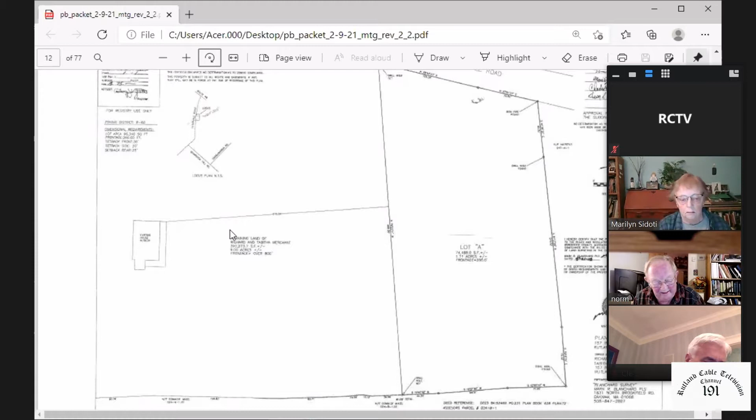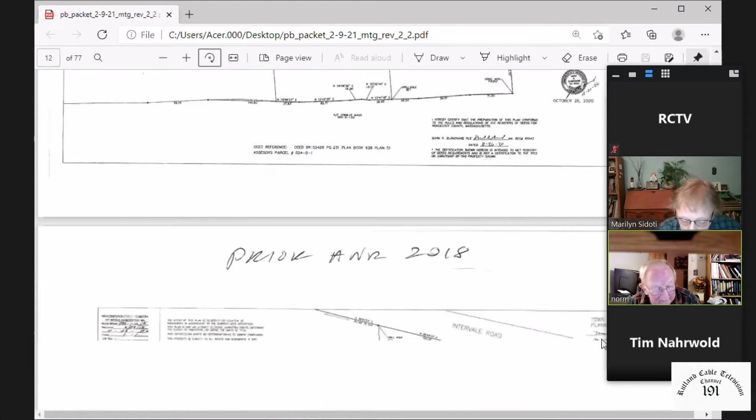Correct, Norm. This is Mark Elbag here on behalf of the applicant. It's creating a single lot. Is that lot A, is the land from lot A coming out of more than one other lot? No, it's just coming out of 157 Intervale Road, his house. It's actually lot B on this plan. Oh okay, I'm looking at it backwards. It's lot B that you're creating.

Okay, and with this ANR application, I'm sure you'll see at a future meeting an application for a common driveway special permit to serve these 3 lots, which is why the easements are delineated on this plan.

Let's see, I'm seeing with my less than perfect vision, 1.91 acres in lot B? Yes, correct. And right around 200 feet of frontage, a little bit more. Yeah, slightly more. I think the lines are 200 feet in width, so on that angle it's a bit more than 200.

Okay, any comments from the board? Yeah, I'm looking at this - Mark, isn't this in the R60 zone? Because Sassawana is the delineation between R40 and R60, isn't it? Yep, R60, acre and a half. 1.49 is not an acre and a half. No, that's 1.91. Oh, I'm sorry, I thought it said - I couldn't see, I've got the small version. Oh okay, I apologize, you're correct, you're right, thanks.

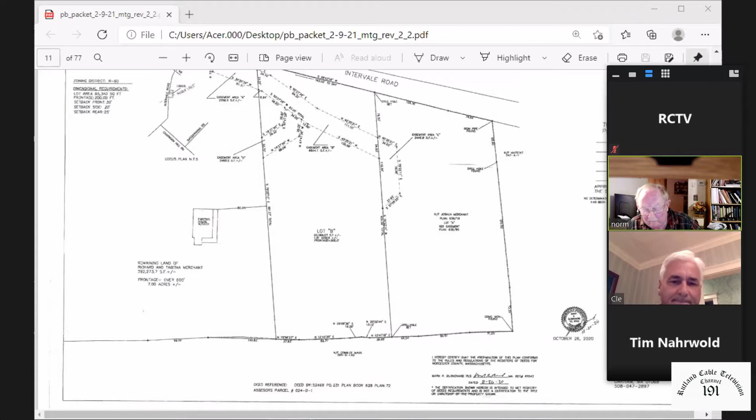So while the easement's not necessary to be shown on the ANR plan, I guess the question is whether this ANR plan is also going to be reused for the special permit common driveway plan. Yes, it is, and that's what's in the application package.

So if the board was to cross out easement on here or disregard it altogether, that would really carry no consequence. The fact that easements are shown on this plan does not provide any rights to use a drive to access more than one lot.

It's really just to keep all the titles clean and keep everything as neat and clean as possible at the registry. So all instruments will be created off of this one plan.

Just to finish the thought, Mark, so currently, as the board recalls, it was a site plan granted 2 years ago to allow for a 2-lot common driveway, which is what's currently in effect. So that is what's in effect now.

The other common driveway can't go into effect until a special permit is granted. Correct. All right, I'm fine. I just was trying to make sure.

So the special permit, when we do that, and that'll get recorded, that will actually have these easements on there that the planning board does have to review because it's part of a common driveway, correct? So what will be recorded and what's in the application is this plan will be recorded.

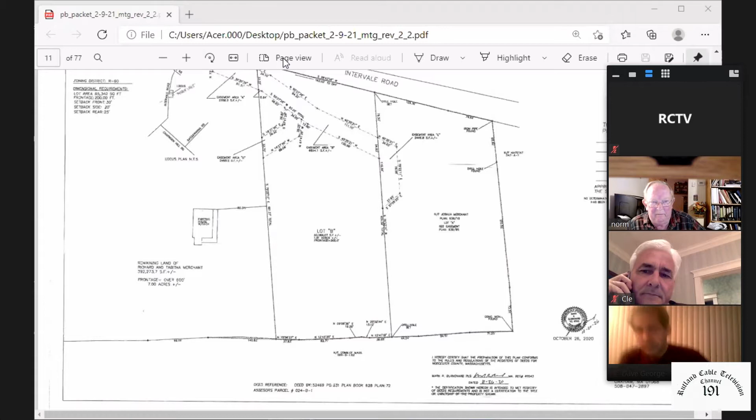Yes, so in the special permit application, you'll have this plan along with the site plan. Okay, good enough.

I make a motion to endorse. Second. Okay, do we have any discussion? Any further discussion on this one? It appears that it certainly meets requirements.

Hey Mark, I do have one question for you. Is that engineering stamp that you have? I can't see because I can't blow it up. Is that a mechanical engineer or a civil engineer? So for this plan, I'm a civil engineer, and this plan is generated and sealed by Mark Blanchard, professional land surveyor. Perfect, thank you, just a question. You're welcome.

Is there anything further? Okay, hearing none, we have a motion and second to endorse. Roll call vote. Tim? Aye. Marilyn? Aye. Sean? Aye. Dick? Aye. Norm? Aye.

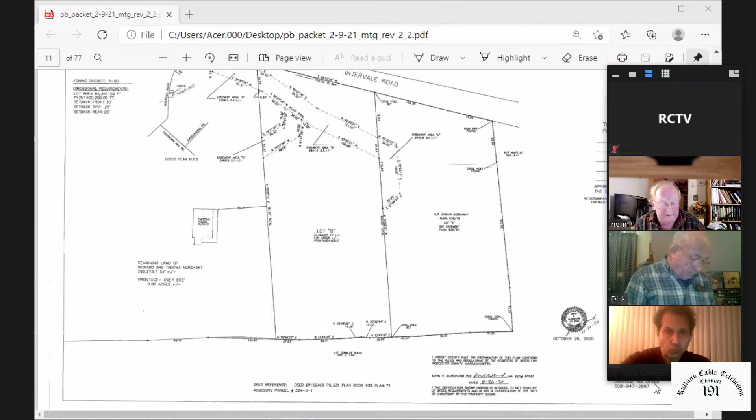Okay, that is Intervale. Thank you, folks. Okay, no problem. Yep.

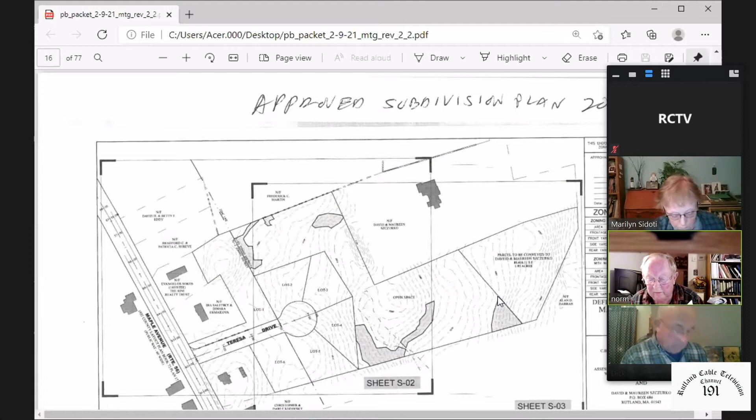We now have an ANR on the end of Teresa Drive in Maple Hill Estates. We have a drawing, kind of interesting. We also, I thought I saw a letter. I thought I saw, I wrote a synopsis of what it was.

I don't see it here. Would you like to go over it? Just cut in real quick. Sorry, the letter's on the screen right now.

I think we're looking at paragraph 3, also on Maple Hill Estates. But Clea, if you're here, feel free to jump in. So what I wrote, Norm, was first of all, I wondered why you guys didn't ask me why I asked for the ANR. So I put in my note, Dave Szczurko is going to take ownership of the open space.

The state of Mass, through the conservation restriction, does not allow fences in the open space, and Dave wants to put up a fence in the back of all those lots. So I had to remove that small strip of land and connect it to Dave's lot, as you see, and I'm going to give that strip of land to Dave along with the open space. That's why that fence is going in, and why that little strip of land had to come out - I had to ANR it. I couldn't leave it in just as an easement; the state of Mass wouldn't allow it on the conservation restriction. So I had to take it out, that's why there's those little pieces there.

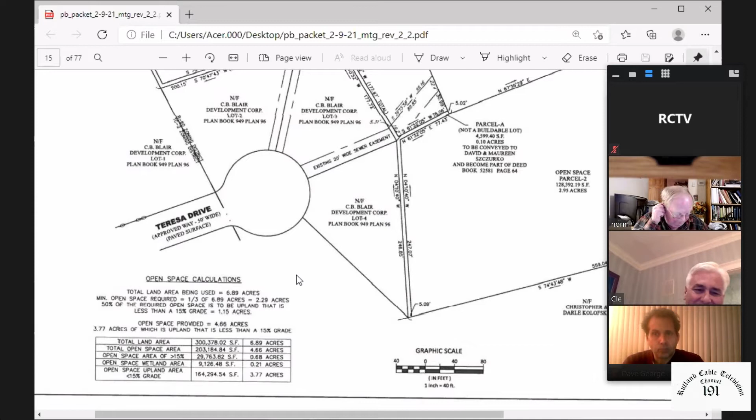All right, good enough, thanks. Mr. Chair, may I ask the applicant something? Yes. Hi Peter, hey Clee. Actually this is much an asking a question as it is telling you that the conservation restriction is finally through town counsel review, and the Conservation Commission accepted and approved the CR at its last meeting. So I'm getting ready to mail it to you.

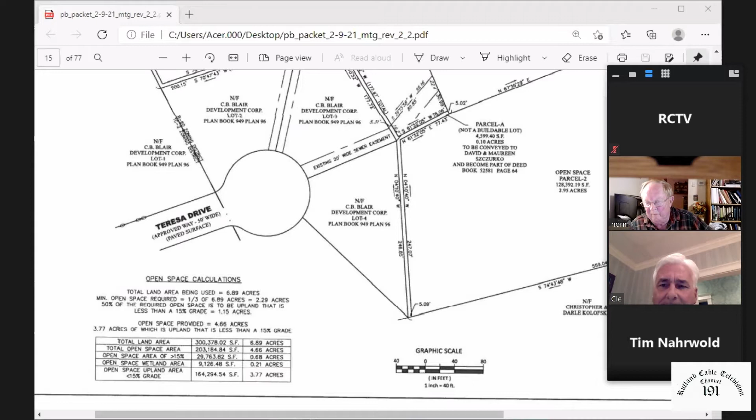Nice, get this email. You and George, I imagine. Yeah, is George still at gmail.com? GeorgeCritzy@gmail.com. The question is now, you can email it to me, but you've got to send me the original to be recorded, you know that right? Well this still needs to go back, because there are mods, DCR still needs to reapprove it. And then everybody signs it and you scan it, send it off, send it to the registry. You get to take care of all that then. Okay, all right.

That's great news, by the way. I can't believe we finally get that. I'll probably have all the houses built by the time it gets recorded. Yeah.

But actually I do have a question. Does it mean that the property description is going to change ever so slightly, I assume? In the open space, yes, and it's on here. Yeah, okay, it's on here but it's not in the CR that I have. That's all. Well, it should reference a plan. So this is going to be the new plan. It'll be on record, and it'll reference this plan. So it'll work.

Okay, yeah, I will warn you that the only additional thing we're really asking for in terms of documentation is as part of the CR to actually put the drainage easement on the CR as an encumbrance. Okay, that's no problem, the drainage easement is part of this plan too. So yes, it's part of the plan, it's just not part of the legal description yet. Okay yeah, we'll fix all that.

Yeah, all right, George will do. I'm sorry to have hijacked the meeting, gentlemen. No problem, no problem. Are you sticking to the meeting Peter, or are you taking off? No, I'm sticking around. Okay, because I got, sorry to interrupt here, but I got the variance finally from the DCR. That's good news, yes, that's great news.

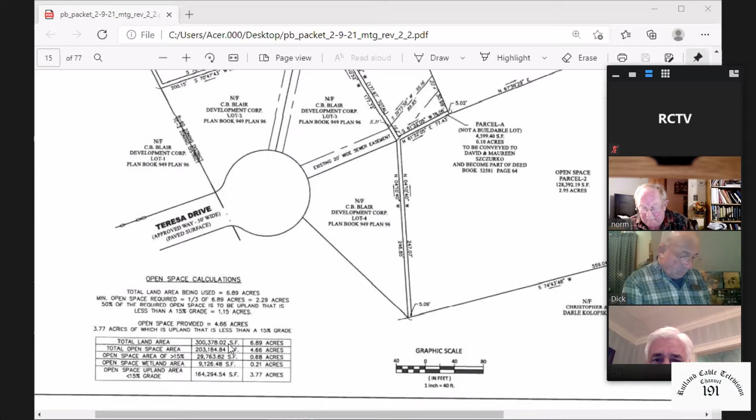Well, except for the drainage easement part. Yeah, that belongs to the residents of the... Correct, I'm just saying once you cross lot 3, which is where the easement is, he's responsible for all that open space and anything that needs cleaned up or taken care of. Yeah, yep, okay, good enough. That's all I was curious about. Okay.

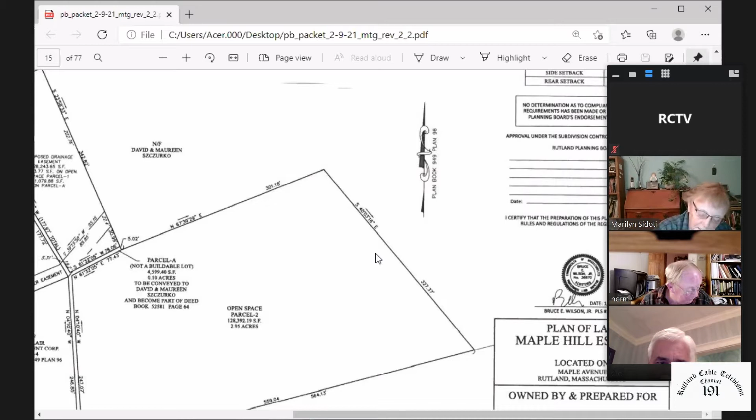Do we have any more questions? Comments, discussion? Make a motion to endorse. Second. Okay, I have a motion and a second. Once again, any further discussion? I think we've vetted this one pretty well. Okay, hearing none, roll call. Tim? Aye. Marilyn? Aye. Sean? Aye. Dick? Aye. Norm? Aye. Motion carries, thank you.

Okay, again, get myself back together. Dave, would you please send me an electronic copy of that plan when you get an opportunity? Thank you. Yes, I will. Thank you. Or Clee, anybody can. I can do it too, either one. Want me to send it, Dave, or are you going to take care of it? I asked Dave today, so we'll, yeah. Okay, great, thanks.

Okay, next is Maple Hill Estate Subdivision. I don't think we have anything more. You are correct, there were no consulting engineer reports received on this matter, so there's nothing to update the board on at this point. Okay. Anyone have any discussion points on Maple Hill? Anyone else? No, no, okay, then onward and upward.

Brice Lemon Estates updates, we have a bunch of stuff regarding Brice Lemon, and I don't know, just taking this kind of in order that I have in my packet anyway. We do have a copy of as-built, I'm assuming this is from phase 1. This is back from November 6th.

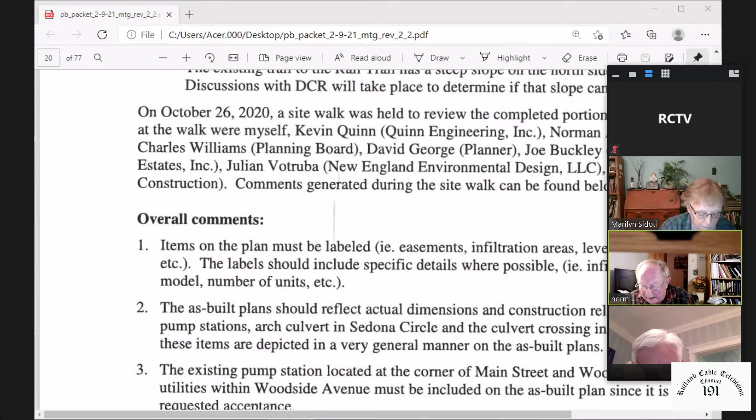Number 5 says it's recommended the board be provided with a certification by a Mass registered structural engineer that the arch culvert in Sedona Circle was constructed per design.

I guess, Clee, what's your problem with it? Well, I'll tell you — the wall that we put up when you first come off of Charnock Hill to block the wetlands, I was required to get a certification by a structural engineer on that, and I did. But the arch culvert and the other culvert with the walls on them — you guys, during the process of getting this plan approved, said that you wanted a structural engineer to certify that they met Mass DOT standards, which I gave you from Mike Maroney.

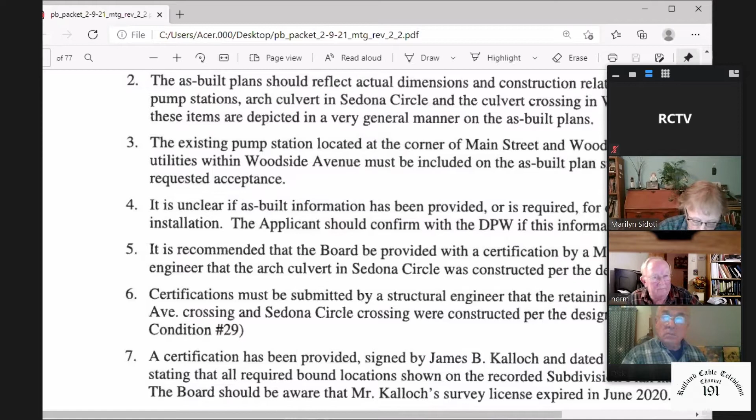So there was nothing done. No — the structural engineer that designed this was with Redi-Rock. He didn't watch them put the wall up, because I didn't know that I needed a structural engineer to do it. If you guys are hell bent on having me get one to certify the walls were constructed properly, I will do it. But I did get from Mike Maroney, and submitted to the board way back when I first did it, that they were built according to Mass DOT specs, and I did submit that.

This is asking for something a little bit over that, that's all. No, Clee — didn't Mike, and tell me if I'm wrong, didn't Mike certify that the design met Mass DOT, but he didn't sign off that it was built per the plan? That's where I think you're right. I think that's right. Yeah, it was designed — well, I don't know what he wrote in his letter now, but you're right, he did.

I mean, what Carl's asking for, which is what I'm used to seeing even in my world, is that you've got to have somebody sign off that it was constructed per the plan.

I don't know what the rest of the board is, but I'd like to make sure that what's there is what was built. I'm not saying the guy's got to be there during construction, he just has to make sure that the guy putting it in followed the plans, and then sign off on it, because the PE doesn't have to be there when he's just certifying that it was built per the design. That's what his stamp is for.

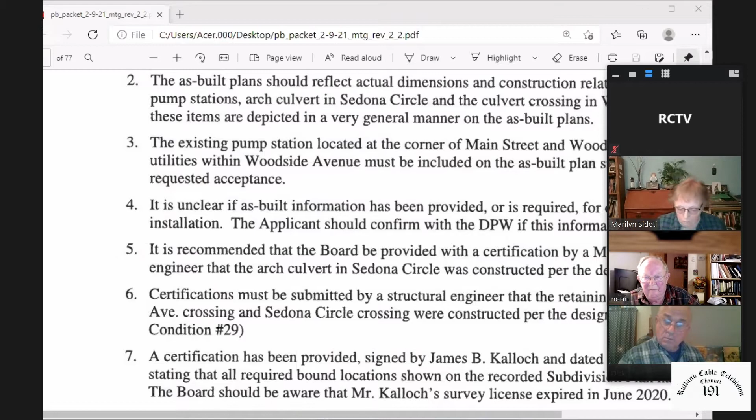I can't read the whole sentence, but if that's what Mike needs, he may have done that. I'll read it again, but I did get, I don't know whether he said built or whether he said design. I'll get a copy of the letter and take a look at it.

So you guys want me to get certification that the arch culvert was constructed. It doesn't matter about the wall, it's the arch culvert itself. Well, the wall too. There's a condition that you need a certification that it was built per plan.

Mike Maroney submitted a certification that the arch culvert was designed to meet DOT standards, and what we're recommending is that someone certify that it was built per the plan. I gotta figure out how to get that done, because I know none of them were there.

I guess Mike could come out and look at it and make a determination. Everything's wide open, you can look at both sides of it.

In my world now with gas, our PEs don't have to be there when it's being put in. They just have to certify that it was installed correctly, with the drawings and any procedures and notes from the installation contractor. Then they put their stamp on it, basically blessing it, and that's the end of it.

Okay, we can move on from there. I get what you want, and I think I can get that done. Carl, am I right in what I'm trying to explain? Yeah, I think that makes sense. At the end of the day, what I think the town needs is somebody saying that it was built the way it was supposed to get built.

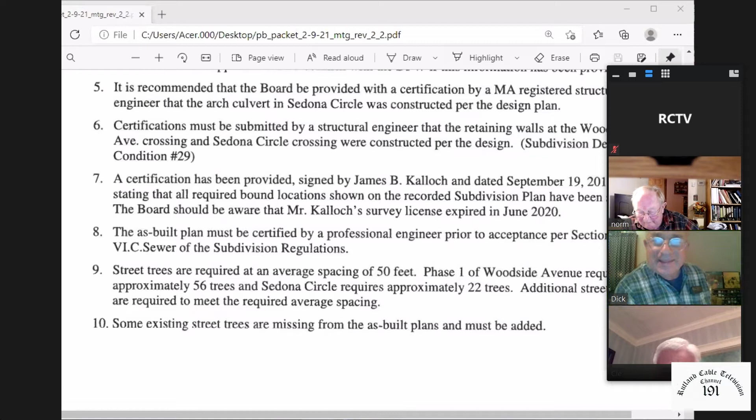I don't know how you're handling that, but I'd say it's de minimis enough, and maybe you guys come out and take a look at the trees that are there and the ones that have been taken out, and see if you think it's definitely 2 per lot. I'm just trying to figure out, through Norm, how to handle this.

Without having a hearing - that's what I'm trying to get away from. I don't want to give an exception to something we had in the boilerplate, but I agree it's crazy to try to fulfill this if it's not making sense to do it.

How about this, if I may, through the chair - have Clee submit a waiver request. Is that something that can be done, Dave? We just don't know which lot is what. Well, a waiver request for the whole division.

But then we're back to the hearing. No, that's not going to be the way to go on this one.

That's the tough part I've got now, because this is plain downright dangerous, but for phase one, can we simply say that essentially, not to the letter, but essentially the requirement has been met? I'm okay with that, I'm just - like I say, that's a little bit dangerous. Well, if I remember the subdivision, the planning board has latitude. So do we say that the intent of the... what's the word I'm looking for? Regulation of the bylaw - yeah, the intent was met. Okay, that would be another way of putting it.

I think we do have latitude as the board to make those decisions, so I think we make it a case by case basis, and this subdivision's a case that we're making that decision on. Dick, did you have something? I like that, I think that's the way to go. Okay, I like it. So Carl, number 9's fulfilled - cross that off the list, thank you.

What was the next one? 11? 12, I think, I can't remember - 12, I think is what I saw. Norm, it's Tamika, if I may - do you think we should do that as a motion?

Yeah, that's probably a good idea. No, it can't hurt. I'll make the motion.

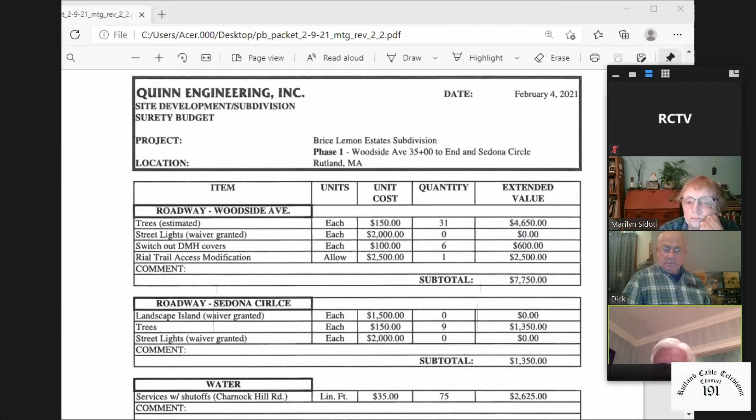I'm going to keep trying, let's just put it that way. Yeah, but why hold the surety on me? I can't do anything about it. If I can fix whatever I need, I did whatever you guys asked me to do. If you can't hold it, for the surety, he's holding surety on it. Like in the trees, there's about 20% of this is trees. So maybe, if Carl's all right with it, and you guys are all right with it, you can take out the trees and just get the surety down to what needs to be done. I don't know, this sounds like a donation to the Orphan and Widows Fund. Yeah, I made enough of those.

Is that all of it, Dave? I can't see that whole thing. I don't have it in front of me, but. Yeah, they're talking about some bounds to be set. We're working on that right now. Julian's digging them out.

One of the things I'm just kind of curious about is they have nothing down there for cleaning catch basins. I cleaned them. Yeah, I know, but that was last fall. And the roads will have been salted and sanded and everything else between then and now. No, I don't use sand, only salt now. There won't even be any. But if you want me to take a look in there again before the meeting, I will, happy to do it. But I had them clean with a vac truck. Yeah, if you're not spreading any sand, okay. Nope, I'm not, just salt. Yeah, but Norm, this is just my opinion, there's been a lot of runoff in that area in the last 6-8 months, right? That's why I just like, and this is my opinion, just take another look to make sure that they're not overloaded with silt and other stuff. I will. I can tell you they're not, because the runoff doesn't get to phase 1, it's in phase 2. But I'll take a look. I'm sure they're right though. These guys, Helgeson charged me a lot of money because those catch basins were really full of shit, to be honest with you. All right, they need to be cleaned.

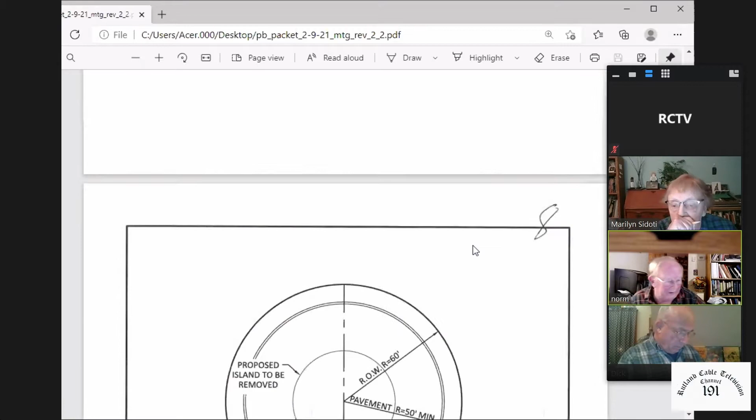It's kind of one of these things where I'm sure the homeowners are impatient, and I do understand, in the middle of winter, you can't really do that stuff. It's unfortunate that it happened to start with. Like I say, I guess...

I'm going to say the one thing that just totally boggled my mind was having that crushed rock filled swale coming right down into the end of that one guy's driveway. Yeah, I'm sorry, but unless you pipe that right underground, it's just the way it worked out.

I know, and we can fix that if we put the riprap all the way down. That's what we're gonna do. It'll fix it. So you're gonna have to tear up someone's yard. But I have an easement there. That easement is in place to carry that water. Okay, put on purpose.

And there's a lot of water coming down there, and I'm going to redirect some of it. But I've got to get that area fixed, and I'll make it right. It'll be right when I'm done. There's a lot of water on top of that hill, it's all coming down. I got to cut it off, redirect it into that swale.

And then the water coming into the swale is coming from all the way behind lot 34, which is that house with the big slope behind it. Yeah, and that's all coming down that swale now. We're building a house on 35 now.

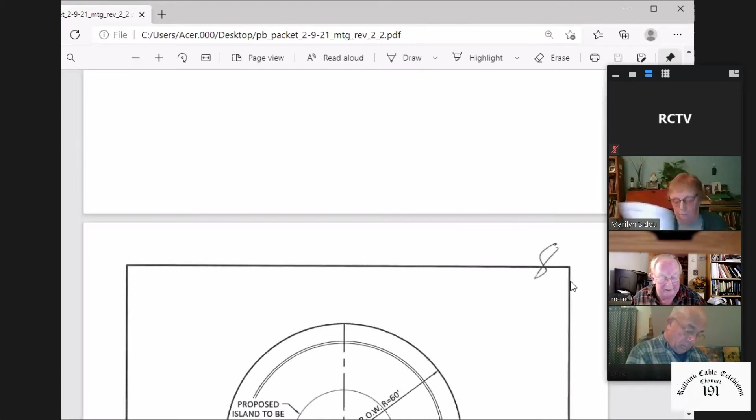Tim, aye. Marilyn, aye. Sean, aye. Dick, aye. Norm, aye. Okay, that is... bond reduction.

Let's see, we still have something else on Brice Lemon. Yeah, we got to do the public hearing. Right. I'm just kind of looking at this. Don't let Carl leave while the public hearing's going on. Yeah, boy, do I have a lot of questions.

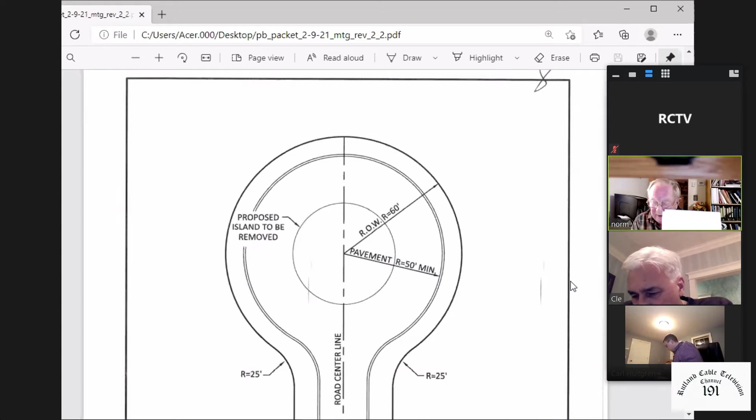Okay, February 4th, this is Quinn Engineering's first review, I guess, of those revisions. And we did - I don't know if Carl, if you've received it, had a chance to look at it. Julian did send off a response to the report. So I don't know, I guess I'm just going to say, what do you have to say?

So I put out a memo on the 4th with comments on the revised roadway layout. I got an updated plan this morning and didn't have a chance to take a look at it, unfortunately. So, literally didn't get a chance, I apologize for that. But I can go through the memo if you want. In general, I don't think there's any big comments, no showstoppers. Yeah, if we could just read through it real quick, as long as it passes muster here, it might be helpful, that's all.

Okay, well then let's go through it. Where the heck is this? I just had it. Number one, it says updated plan must be stamped by a professional engineer. We did that. Let me just see, I'm just looking for... oh, I know I printed out - there it is, the reply. Okay, reply says it has been stamped.

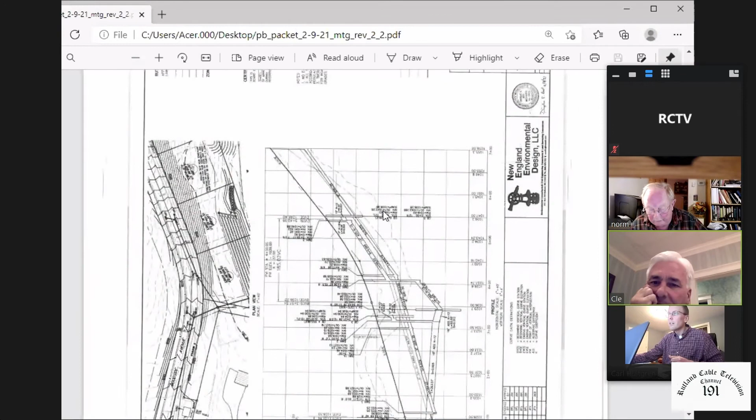I don't know, Carl, if you've received the stamped version or not yet. I got it this morning, but I haven't taken a look at it at all. Okay, the stamp is on the plan, just so you know. So the thing is, Carl, you haven't reviewed their response, so I don't think there's any reason having you comment on their response. We'll just note that they have responded.

Okay, so an updated subdivision plan that reflects the revision of the roadway and lots must be prepared and recorded. They said an ANR has been done, blah, blah, blah, and recorded.

Number three, so if I can just summarize this one real quick for you - at the bottom of Woodside Ave, there's a curve that comes into Main Street. And there are dimensional requirements for curves so you have enough sight distance. This is a curve approaching a stop intersection on Main Street, so vehicles are going to be traveling relatively slowly as they approach. So we had noted in the original review that the dimensional values don't meet the AASHTO requirements for a 30-mile-an-hour roadway, but in this case cars aren't going to be traveling that fast. Basically this comment just says make sure the sight distance is still good for a car traveling at a relatively low speed, that's all.

Okay, we did do that, and it did pass. So you'll see when you look at the plans, Carl. Okay.

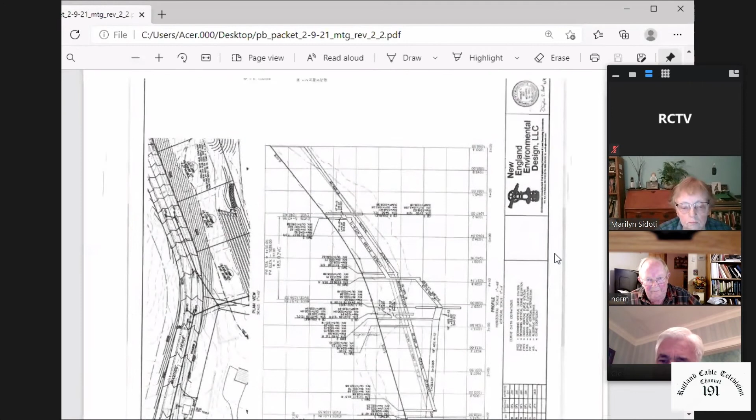Norm, I don't have a problem as long as, I'm looking at this drawing that was submitted, and what does it say? So sheet 2 of 13. So we'd have to replace in the plans for phase 3, we'd have to replace sheet 2 of 13 and 1 of 23. Yep.

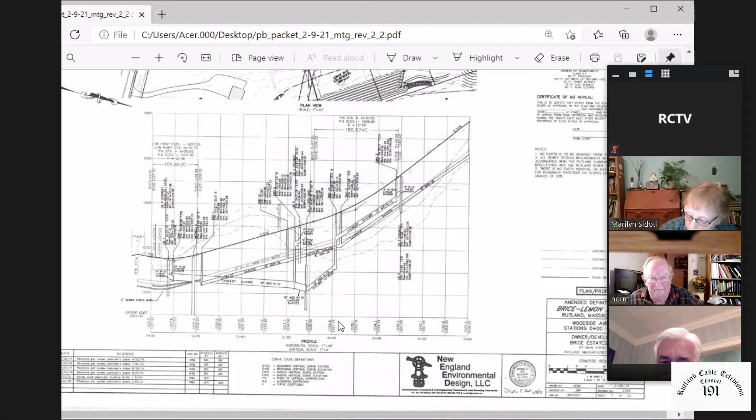I mean, as long as they're revved up and placed in the original set, I'm sort of with Clea. I don't need to kill a tree as long as these get submitted to the board and put into the original set. I'm old school, I'm used to having a drawing rack, and I just open it up and put in the 2 new drawings and throw away the other 2. That's what we have. Yeah. Okay.

But I think from your perspective, Norm, from the electronic version, we should get submitted a whole new electronic version from Blair for this job with these 2 in it. So I don't mind replacing the paper copy that we have, but I think an updated set electronically should be sent to David. That I can do, and I don't kill a tree doing it. Oh, doggone it all. That's my opinion. Take it or leave it.

And the Conservation Commission, please. Yes, conservation too.

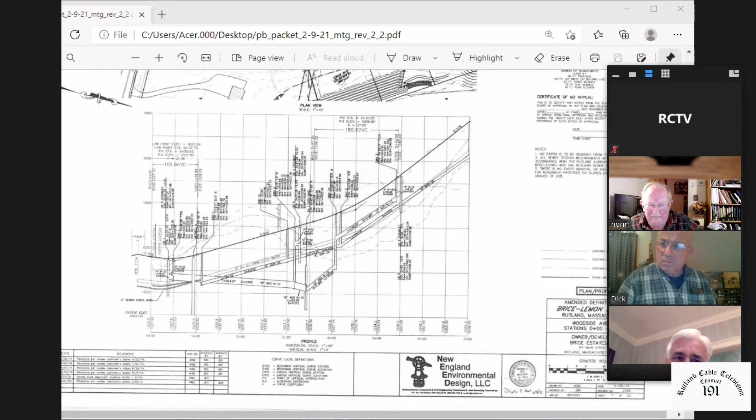Dave, I just got to ask you now, is this something that you feel you can accomplish easily enough? Replace sheets? Just to recap, so the idea is to submit only revised sheets and then replace the existing with the revised sheet only? Yes.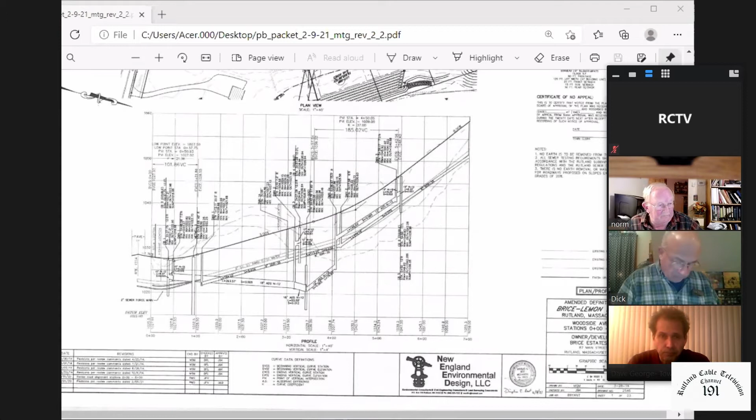But send you a complete revised set electronically with the date that the revision or the date that the revised set were added, and send that to you to put in a file.

Well, the problem with that on the paper is that they're all stapled. I don't have a stapler that could do the job of restapling them. I do. I'll come up and get the plans, and I'll replace the sheets. I have the stapler and the remover to get those out.

So if that's agreeable to the board, then the plan set in the office, if it gets updated periodically as the board's describing, we would always have the latest plans. Yes, with the replacement sheets. Then we'd have several versions of an electronic copy, which can also be stored as a backup. But I'm assuming that Carl has all this as well.

Carl? I have a paper copy. I'd love to get the updated electronic copy. I'll get that for you, Carl. I have to send it over Dropbox. Is that okay? That's fine.

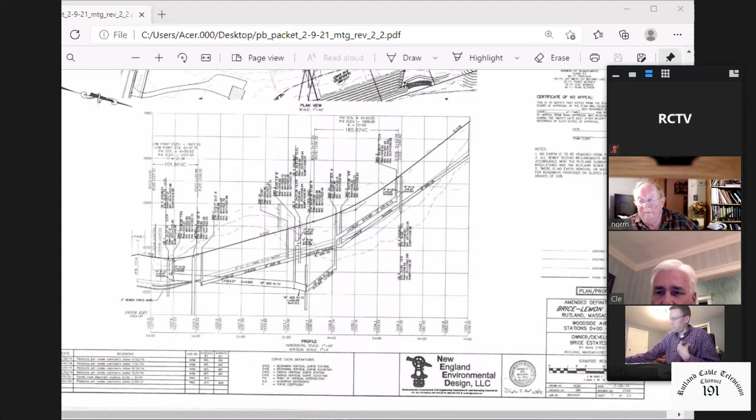Yep. Okay. So maybe we can coordinate a time that would work, Lee, for the paper. Sure. Since you're going to do that, you might as well provide a master sheet that has the street name replacements.

Just like there's one of these plan sets, there's an overview of the street names. You updated 3 of the street names some time ago, but I don't have the latest revised paper that indicates that. Okay, we did update it. Yeah, I can do that at the same time.

Yep. And I think there were some changes to the grades and some of the utilities for phase 2. I don't think we have those as a paper copy either. So if we're going to do some revisions to the main master paper set, we could just update it with all those things that we don't currently have. Yeah, you know what?

I've replaced them in mine, and I kept a copy of what I did. I'll have to get that out. If you could, maybe as you think of them, just jot them down. It would make it easier for me to make sure that you get the right ones. Sure, I can do that.

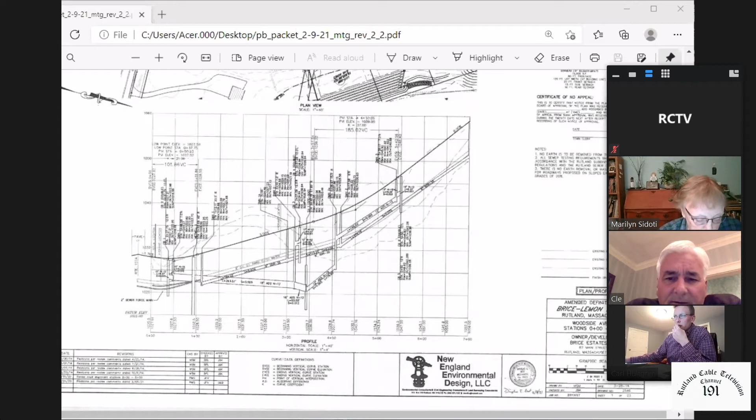Carl, since you're here, would you be able to double check that I have the right ones that we don't currently have in paper? Yeah, I can go through yours too. It'd probably be just as easy. I'll take yours, match them up with mine, and whatever I have that's different, I'll replace. I think that's a good idea, especially if yours is the most current paper plan set. Yeah, I'll make sure. I know what to do. All right, okay, good. Thanks.

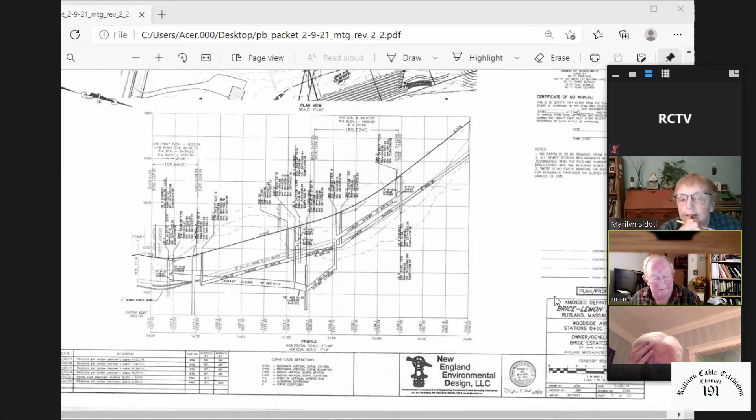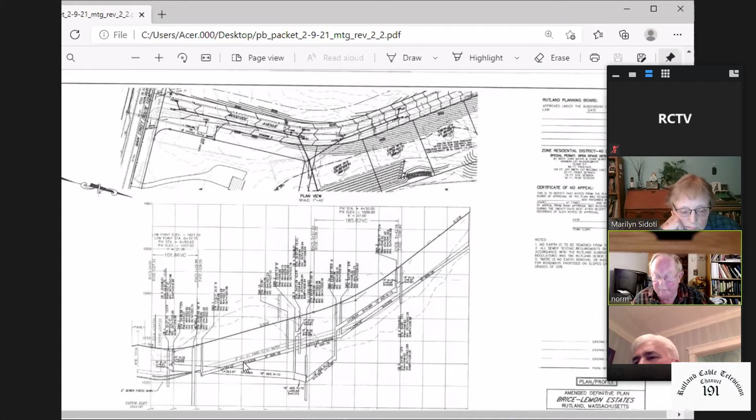Okay, I think maybe, next meeting - well, I made a little teeny tiny mistake here, in that I did not give notice that this was actually part of the public hearing on the revision. We all knew that. It didn't matter. Well, did you hear my motion?

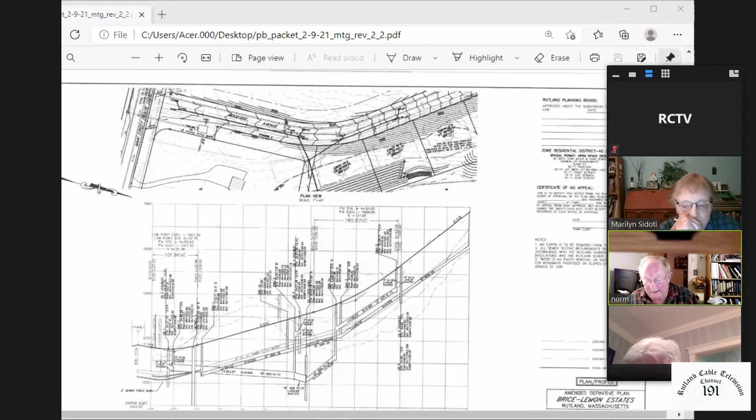So anyway, the thing is, do we have any more questions on the Quinn report or what we've seen so far for the reply to it?

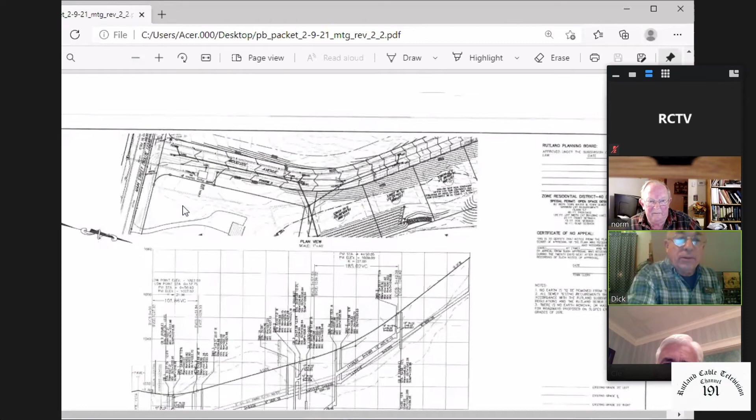Norm, while you've got that right there, and if Carl is still there - where Main Street is coming onto Woodside Ave, on the lower part, on the curve where it comes off of Main Street. Come back over to Main Street a little bit more to the left. Right there, there's a drain that comes across 122A.

Is that drain capable of draining to the catch basin, or does it go across the other guy's property? I just don't know if anybody's ever seen that drain. No, Dickie, it's on the plan. No, it's not on the plan, but if you come down there you'll see where we've got a pond next to the road, next to Main Street, and it does go right there. It goes under Main Street, so it's not as far over as the cursor is. It's back more towards the site, and there's a culvert right under Main Street. That's what you're talking about, right? That is correct, right about where the cursor is now.

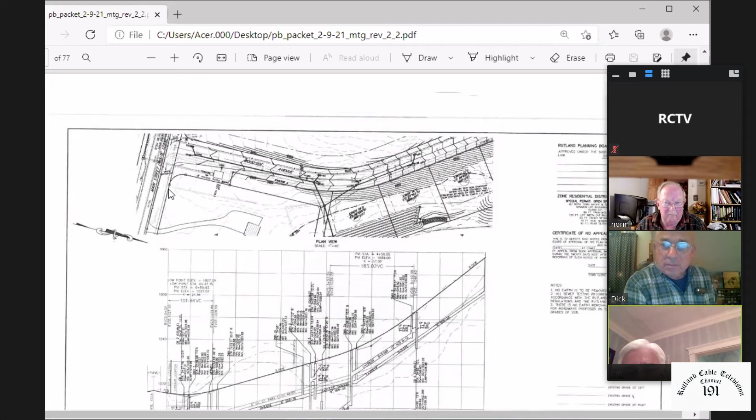And that, if it flowed, it would flow into the catch basin? No, it flows into that culvert right now, but it's going to flow into the catch basin and back into the drainage area. It will eventually flow into the catch basin. It won't go that way anymore.

Norm, I had a question for Clee. Being that I've got a great memory, I remember asking you about the pipes between the lots right off the curve. I remember you telling me you're getting rid of that, but on the new plan I see it there. So what happened?

Well, we just responded to the comments. In other words, right now that's what's been approved, that's on the plan. We're leaving it on the plan. We're going to redesign that and give it back to Carl for his approval. But as of right now, what's designed and approved is on the plan.

So all you're doing is basically getting this road straightened out, and when you redesign that, you'll come back to us again. Exactly. All right, Carl, you're making money twice. I like that. All right, good enough, thanks.

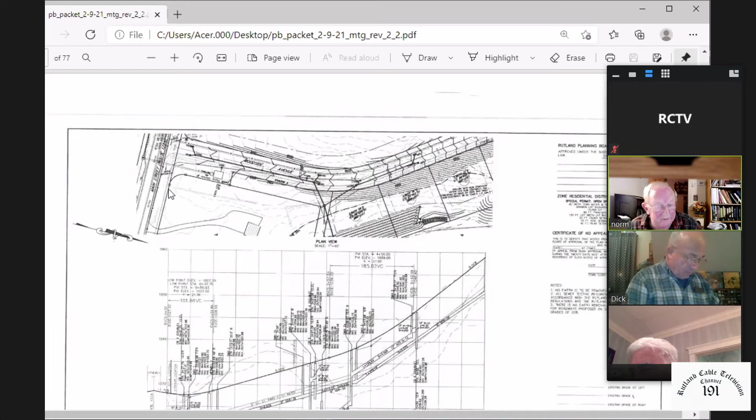Okay, do we have anything else on this latest Quinn report? While it sort of appears that things are fairly well addressed, we still do not have our final review from Carl, and with that, I don't feel that we're really ready to close the public hearing.

I make a motion to continue the hearing until our next planning board meeting, which is February 23rd. I'll second that. Okay, do we have any discussion? Hearing none, roll call vote.

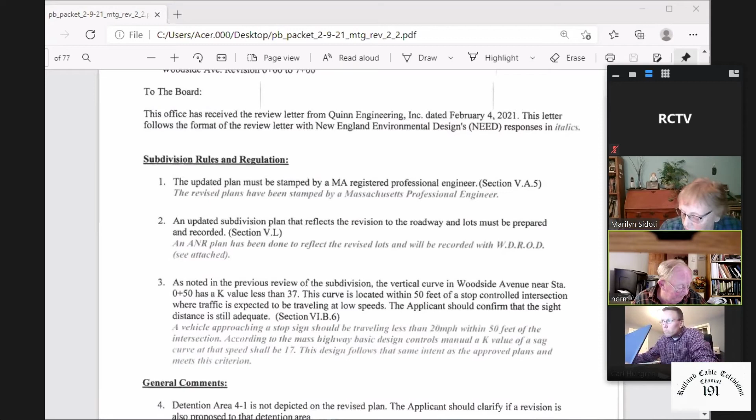Tim? Aye. Marilyn? Aye. Sean? Aye. Dick? Aye. Norm? Aye.

Let me see, once again I gotta get myself back to somewhere here. I think we are done with Brice Lemon unless there is anything else. I hope not. And with that, one moment please.

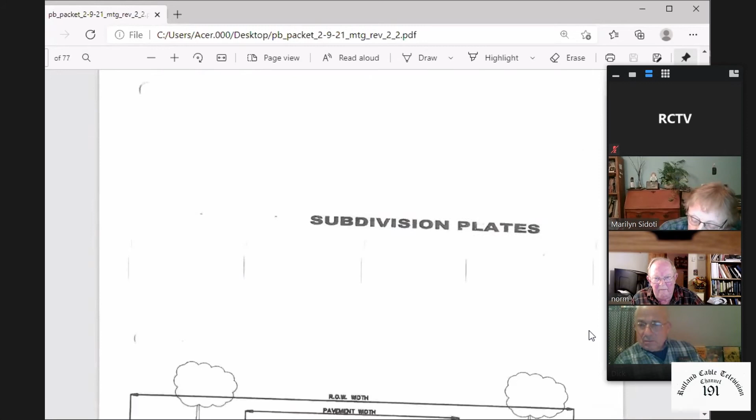You have the first course at 18 inches thick, with a 6-inch max stone in it, which is a good sized stone, but then you cover that with another 6 inches of a finer material, like a 2-inch max stone. So you end up with 24 inches of gravel on your roadway, which is by far the most. Most communities are like 12 inch. I think Holden is 18 inches maybe. No, Shrewsbury's 18, and that's even on the high side there. So 24 inches is a lot of gravel.

Is it really? The old man showed me how to do it with a mason jar, put gravel in there, shake it around with water in it, and see how much other stuff is in there. To me, sometimes this bank gravel isn't what you should really be putting in there because it's got an awful lot of loam or clay or something else in it.

Similar to the pavement, every time somebody puts down gravel, Yankee comes up and takes a sample every 50 feet I think it is, and compares that to the DOT requirement for gravel. The DOT has a specification they use for gravel. You can see it right there on the page, near the bottom. It says type D for gravel, 1.5 inch largest dimension. That's for the thinner of the layers of gravel.

So when they do the testing, they take a sample and figure out the particle size distribution, how much percentage should be a certain size. The DOT has specifications for different types of gravel, but we use a particular one that they have. If it meets it, it meets it. If it doesn't, then we investigate why it doesn't meet it, or have more samples taken, or whatever.

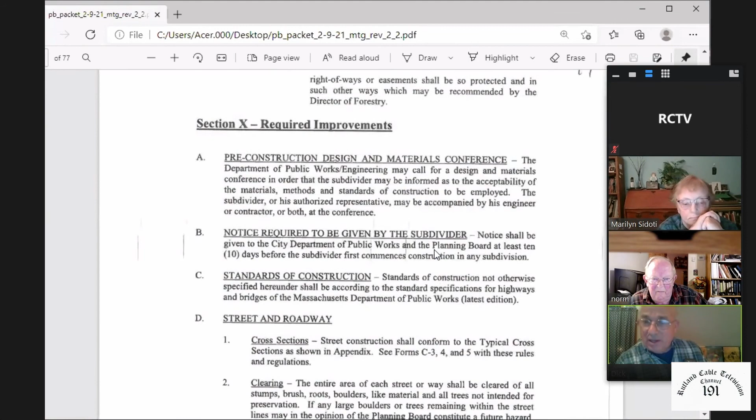Oh yeah, you can specify that too. I mean, that's something we have not done in our regs, but it sort of all goes back to the compaction. Once the gravel is rolled, the testing company comes out again and does compaction testing, and it's going to be 95% compacted or greater. So you can roll it with a big roller or a little roller, it doesn't matter, as long as the compaction is there at the end of the day.

Yeah, but with a big roller it would take less time to go back and forth over it than a smaller roller. That's up to the contractor though, that's his money.

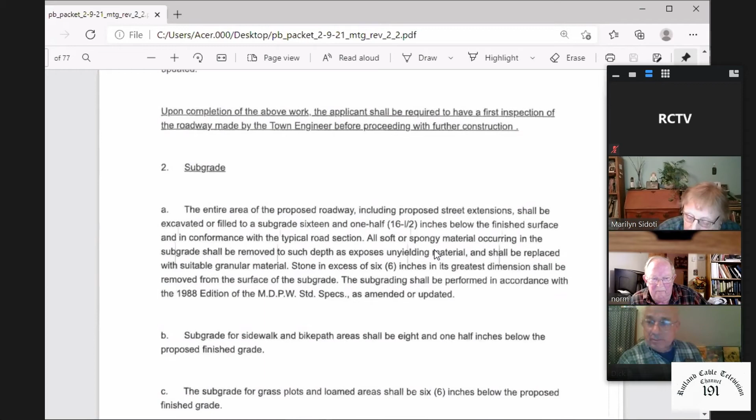You know, Norm, I don't have a problem equaling Holden or Shrewsbury to 18 inches, and then one level of that is a 3-inch rock as opposed to a 6.

Well, but you know that's what I'm saying, and I'm just looking... I don't know, are Holden's roads worse than ours? Yes, you know. Yeah, but part of their problem is they use brick supports for their manholes.

I don't know, I'm just kind of thinking of the trade-off, because I fully agree with the increase in the asphalt. That to me makes very good sense.

And Norm, that's what I was thinking. If we're gonna increase the cost to the developer on asphalt, I think we should throw a bone at them and maybe go from 24 to 18, and then just like Carl said, instead of that last row of 6 inches, make that a 3-inch. The last 6 inches of it is 3-inch stone as opposed to 6.

No, I think the only 6 inches is the bank gravel. Oh, am I wrong, okay. Is that right, Carl? But in my opinion, also when you're talking density or rock sizes and gravel, if you're out towards Long Pond, the ground out there has got more gravel in it automatically right now. But if you go towards Holden or something like that, you're running into more clay and more water, you might say. So in a way, I'm a little leery of going from 24 to 18.